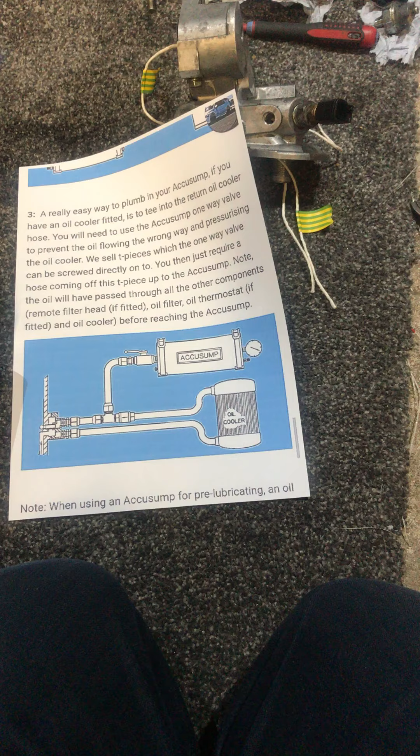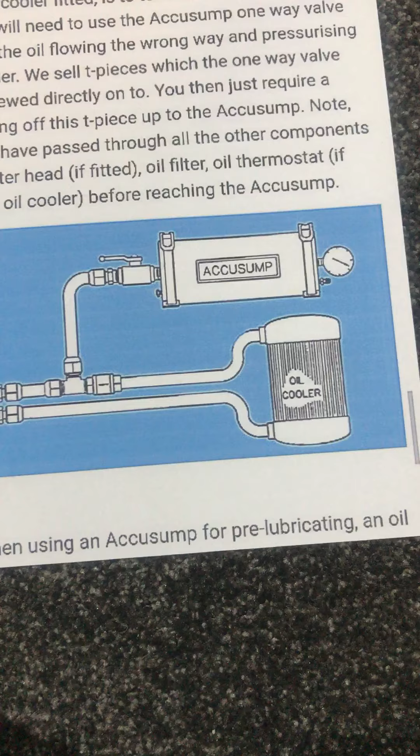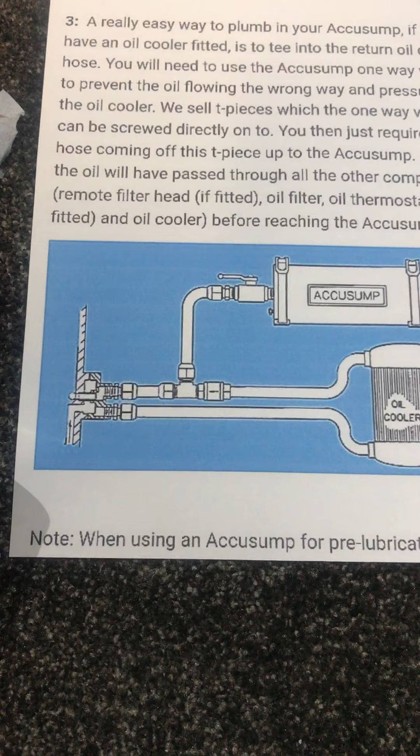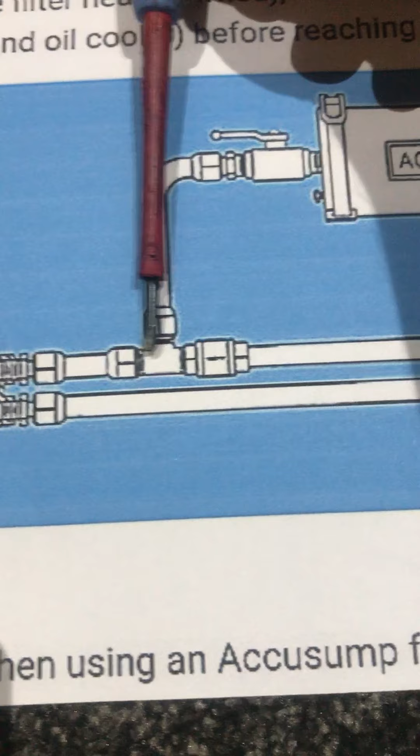Okay boys, I just want to get the boring engineering, definitely is it right, the flow and all that, bottomed out. So that is essentially how I had my Accusump. It was on the return from the cooler, and I'll show you that through the housing in a minute. And then instead of it being teed in this line here, it was just further over here, so that is the same.

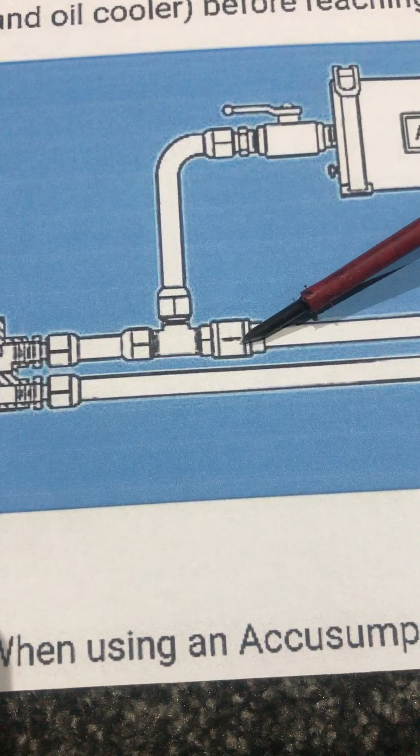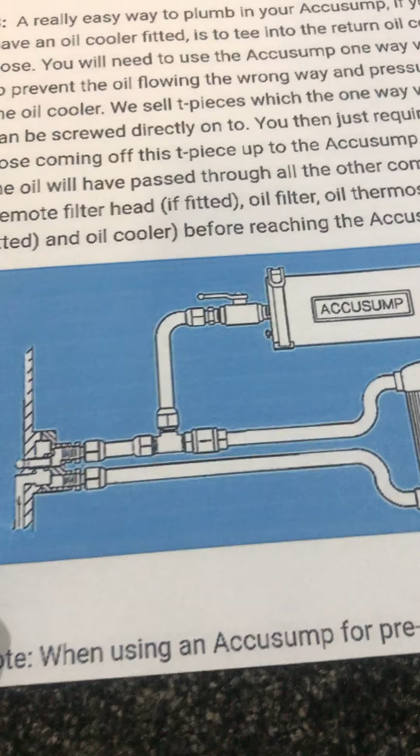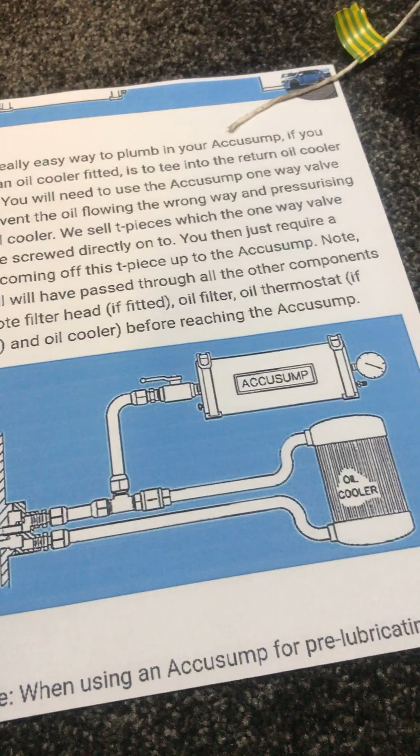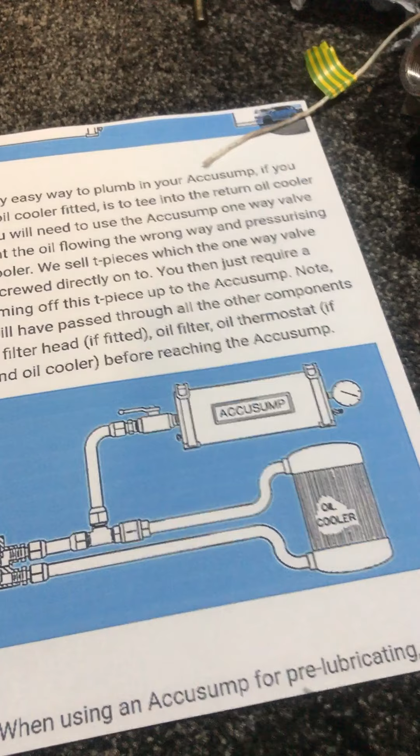But what we didn't have is this check valve here that only allows flow that way. So it's dependent on how you... because people are saying you'll still have engine failure when you're using an Accusump. The bearings won't die, they're still getting pressure, but what people say is that the oil pump is spinning and it's getting no oil. So obviously the oil pump pumps oil and sends it, but in doing that it lubricates itself. So if it hasn't got any oil, like I think Gary from APT had said, if there's no oil being picked up from the pickup, the oil gear is essentially scratching itself to bits inside the housing because it's getting no oil flow across it.

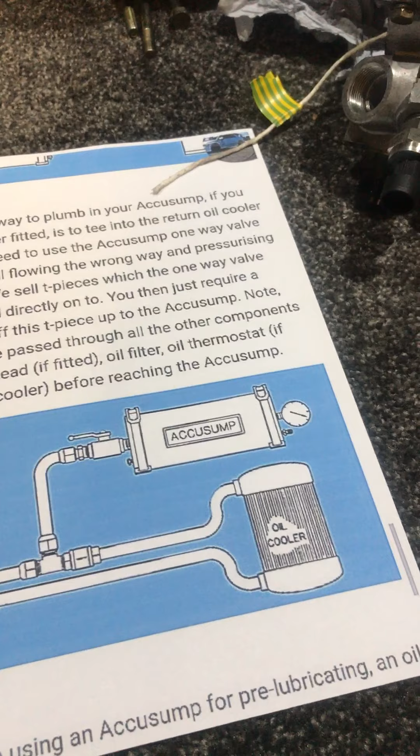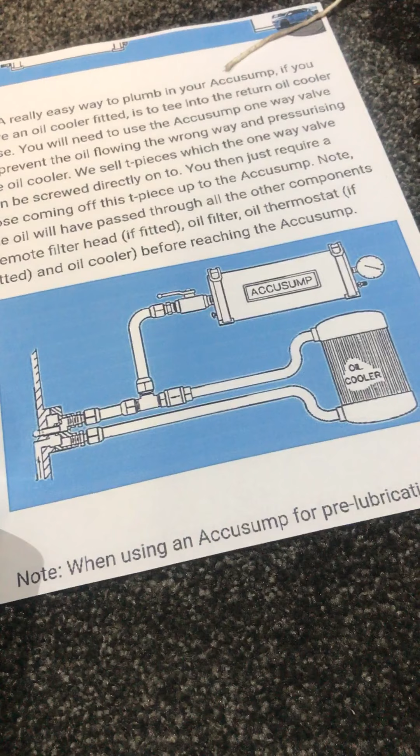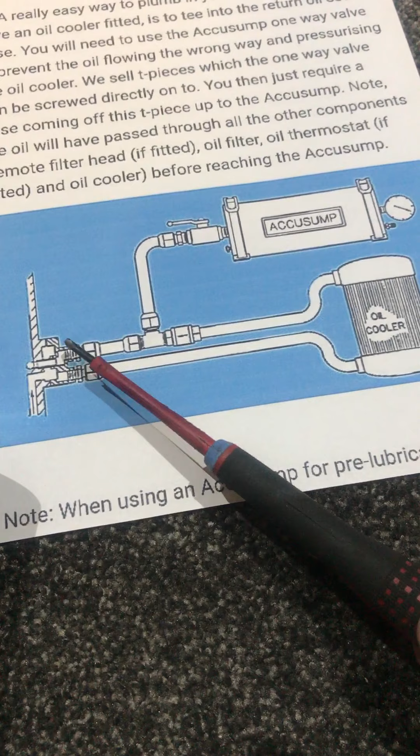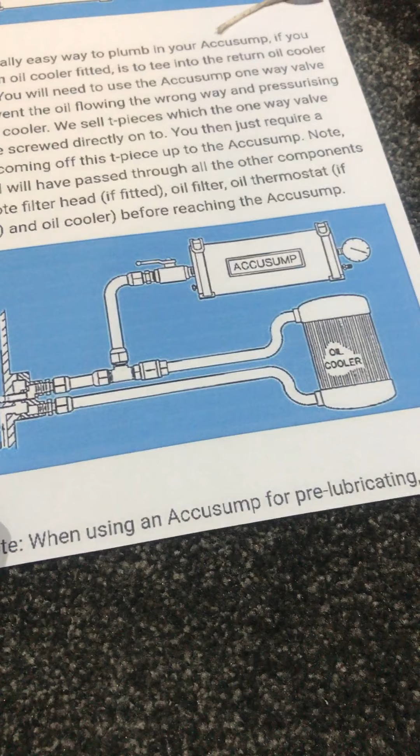It's not pre-lubricating. So the way I've got mine, I can see how I was only making 4 when my oil pump was in surge and couldn't send any oil from the pickup. My pressure logs on my ECU were only showing about 4 bar. Obviously I've had this engine failure, but it's not attributed to that because we took the bearings out. The bearings were fine. There was no wear whatsoever. So it looks like 4 bar was okay, but this is where it depends on what you think.

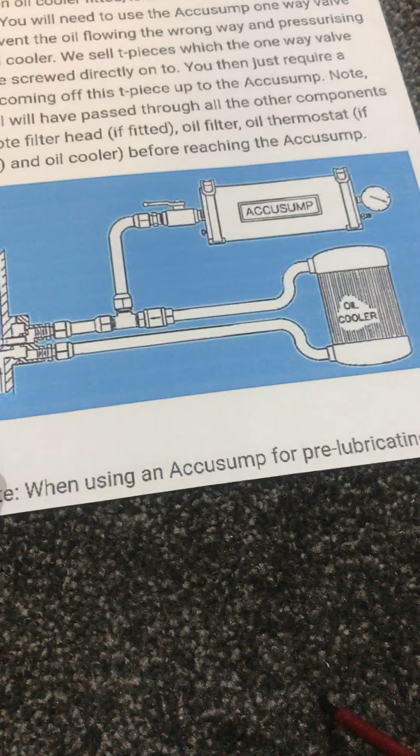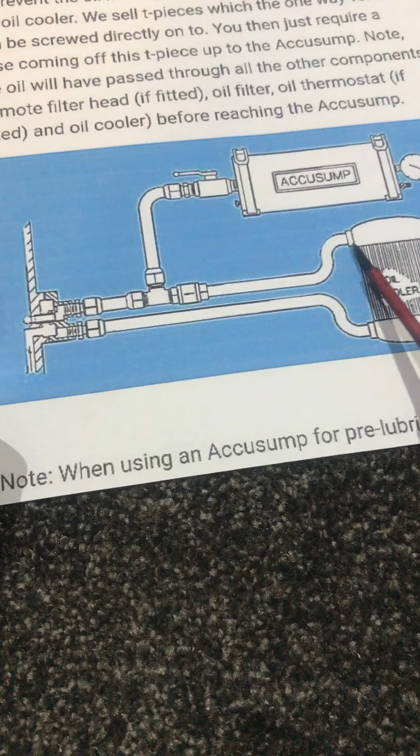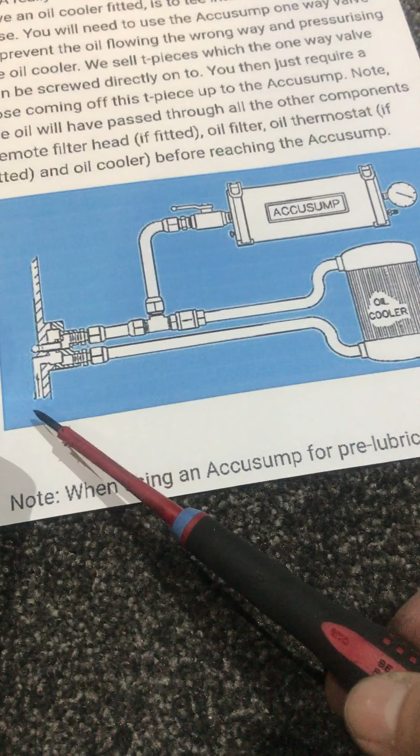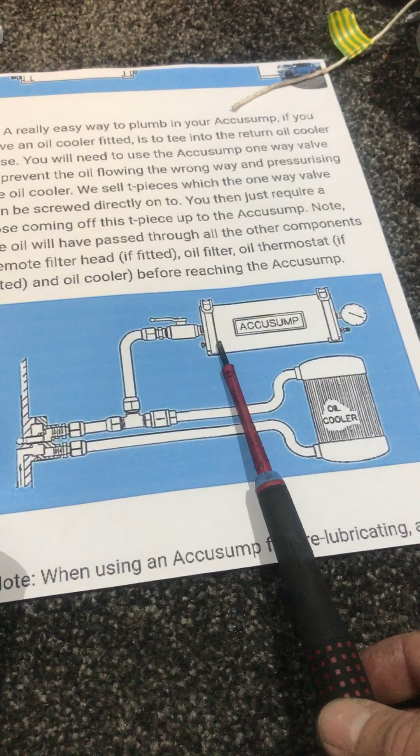Because I didn't have a check valve in here, when there was no oil flow from the pump, the Accusump was dumping oil into that line. What must have been happening is some of it was going to the bearings, and that's where I was getting the 4 bar of pressure from, and some of it was flowing back through the cooler and back into the oil pump and probably into the sump, into the pickup. So reverse flow, if you like. So whilst I like that idea because my oil pump gear is still getting oiled by the reverse flow of oil, my bearings are getting 4 bar, but I think it's reduced. And I think the oil in the Accusump is getting used quickly because the engine's getting some and we're getting reverse flow back to the oil pump.

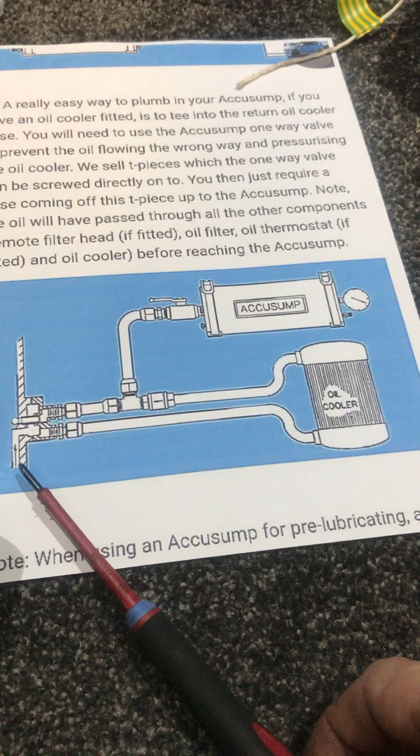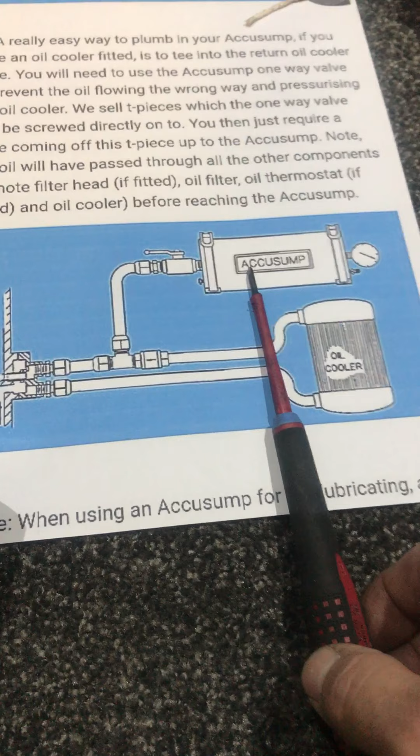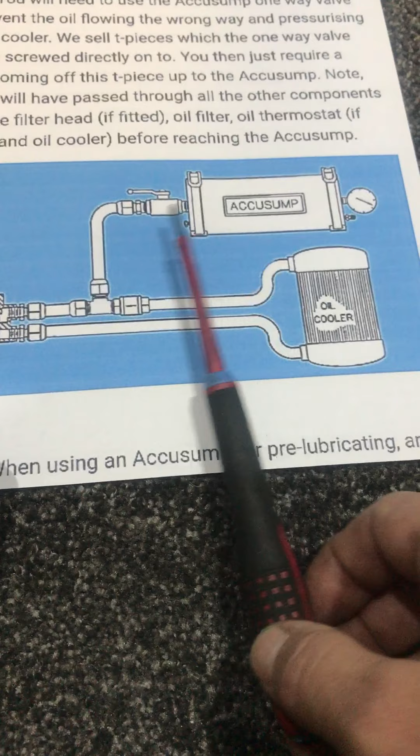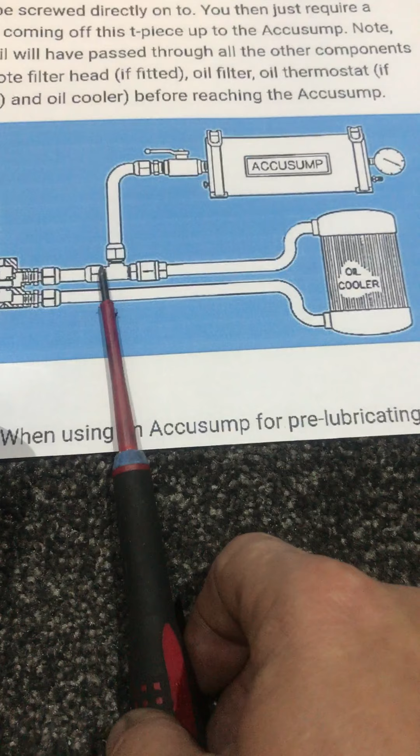So it's one of them. If you put a check valve in, you're not going to send oil to your oil pump, but you are going to have oil stored for probably a longer period, and you should have higher pressure to your bearings. So it depends what you want. I'm in two minds still whether I want to fit the check valve and get higher pressure to the bearings from the Accusump, or leave the check valve out and get a volume of oil, because we are using the big Accusump, at about 4 bar. We know it's lower than what we should be getting, like 6 bar at 6,000, 7,000 RPM. But my engine seems to have been okay on 4 bar, and the tuners are saying you only need your cut down to sort of 3 bar.

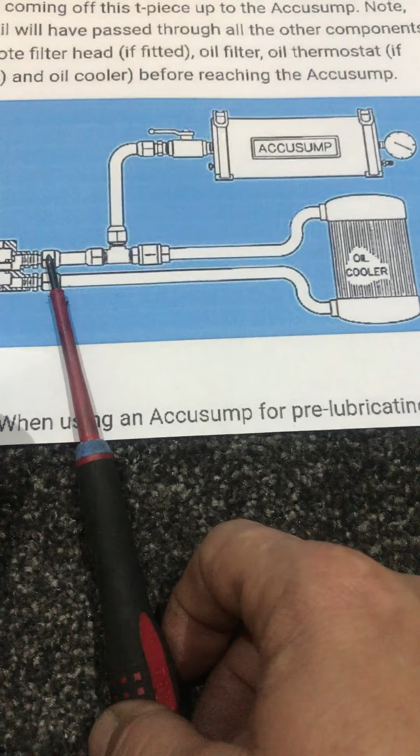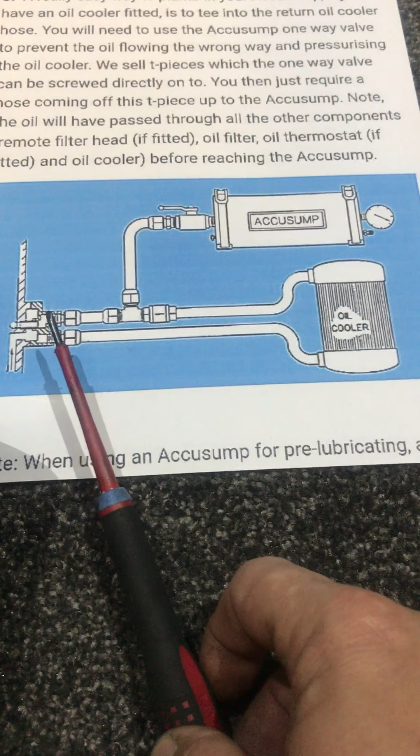So it depends what you think here, whether you want oil to go back, or if you put a check valve in, I think you're going to maintain a higher pressure, but no oil to your pump while you're in that surge, which should only be for a real short amount of time.

Fucking hell, 5 minutes. I didn't know I could talk so much shit.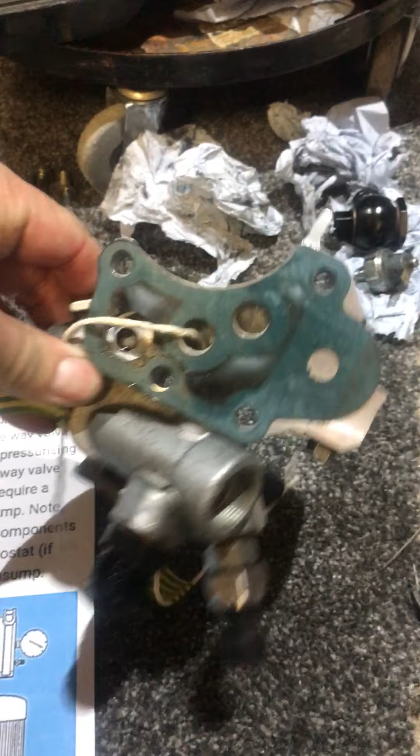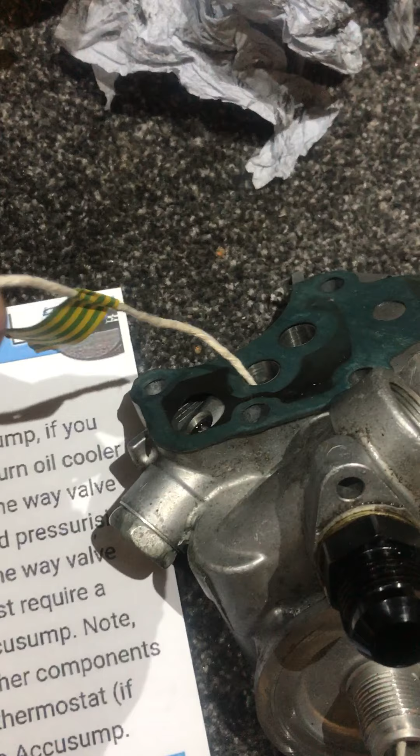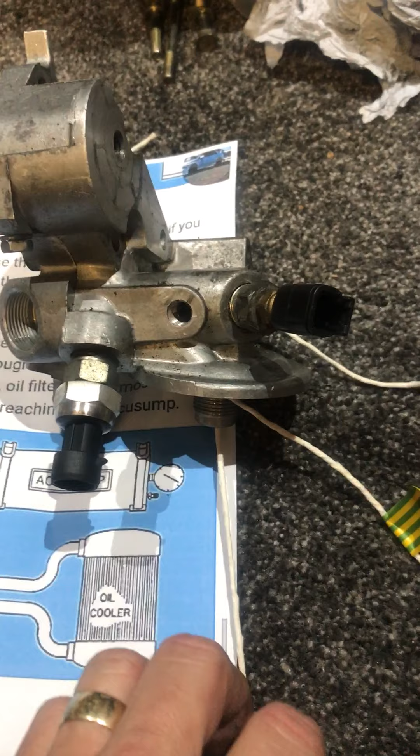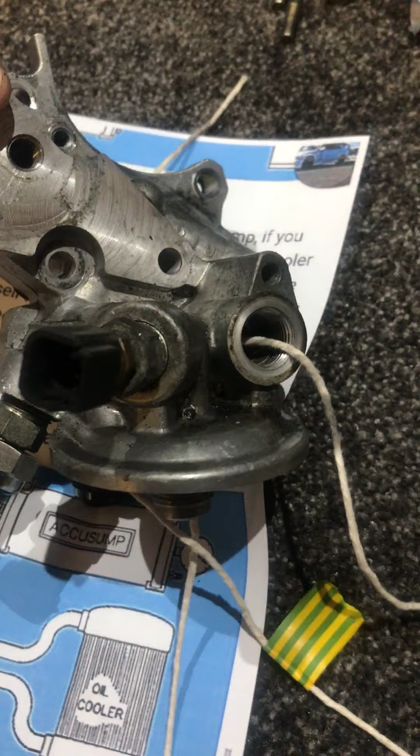And then I looked at the oil housing, because I wanted to understand where the flow came from. From Sergio's drawing, it shows the oil coming from the pump from them rebates in the block. So that must go to that hole first, and that comes out there to the oil filter first. It doesn't go anywhere else, straight to the filter. So I reckon that's right. Well, it is, because I've put the string in there. Then it gets filtered, and then it goes back into the housing, and then it comes up into the housing and goes to the cooler. There's no valve or anything in between, nothing can stop that, so it goes to the cooler first.

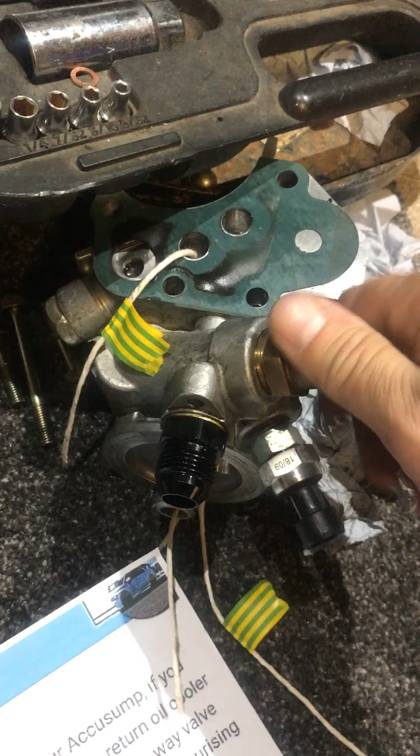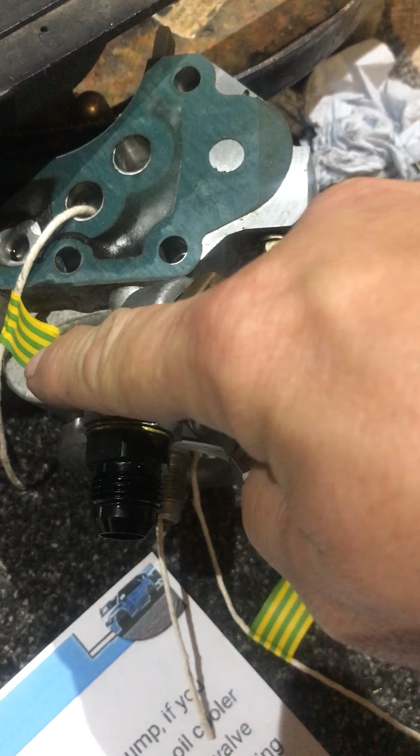But what there is on the back side is where that valve goes in. Let's see if I can get this right now, on your guide. So that goes in there, and what happens is that oil that's going up there comes up in the housing here, and when it's cold, oil is allowed to flow along there and up into the gallery. So it doesn't get blocked down this port. All three ports are open down the way and then up. So some oil comes in here and then goes up to the oil gallery.

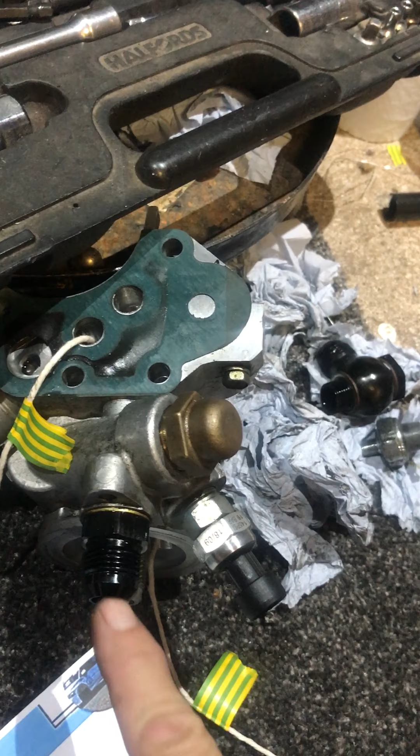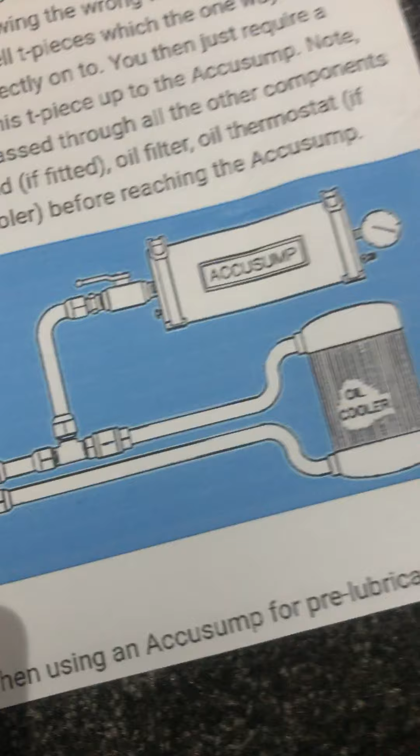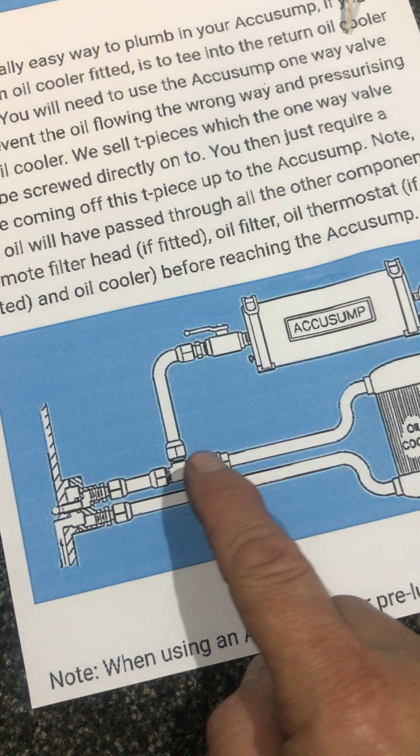When that's shut, it goes round the cooler, comes in this way, then goes up and out there, so we have got my T-piece on the right side, compared to this diagram, which is the return. So oil comes from your pump, it actually comes through the filter first, then to the cooler, comes back, and then my T-piece is here and then into the engine. So yeah, I'm happy with where it's plumbed. It's just a case of, what do you think about the check valve?

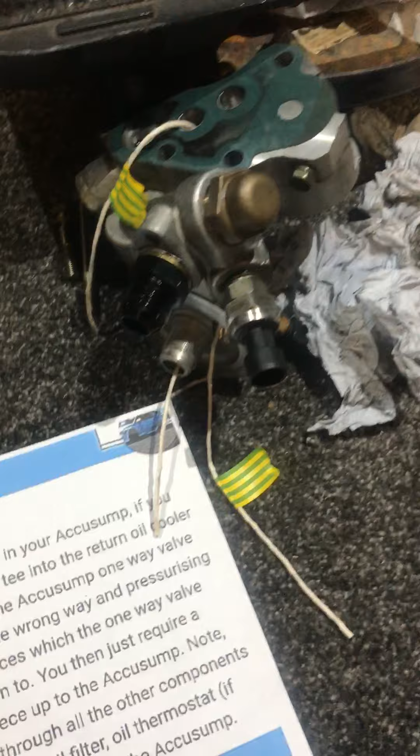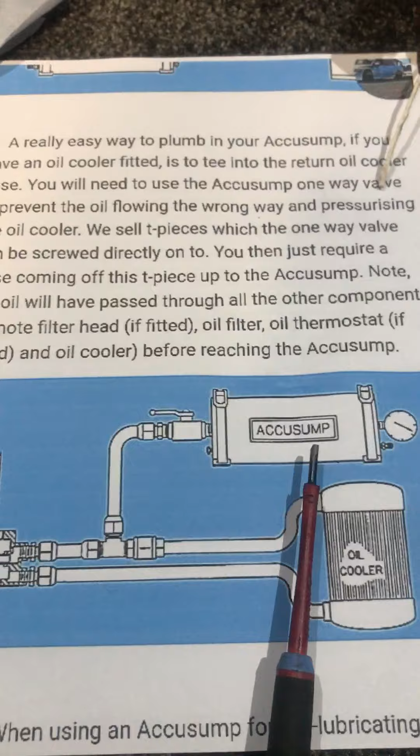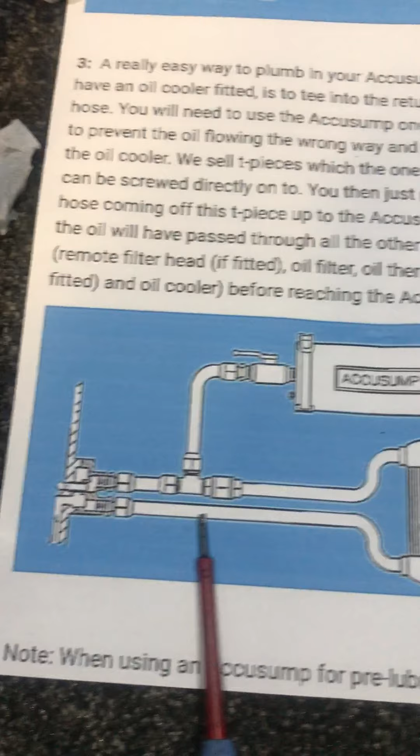And that was the reason why, 8 minutes in, when I was opening my Accusump with the engine off, I'd got 6 bar of oil stored in the Accusump, which I know because I've got a gauge on the oil side. So I turned my tap off while I was at 3,000-4,000 revs, and I stored oil pressure in there. Turn the engine off, and then, to me, if I've got 6 bar in there and the engine's not running, open that tap, then your oil pressure should go up to 6 bar or near abouts. But I was only getting like a bar, maybe even less.

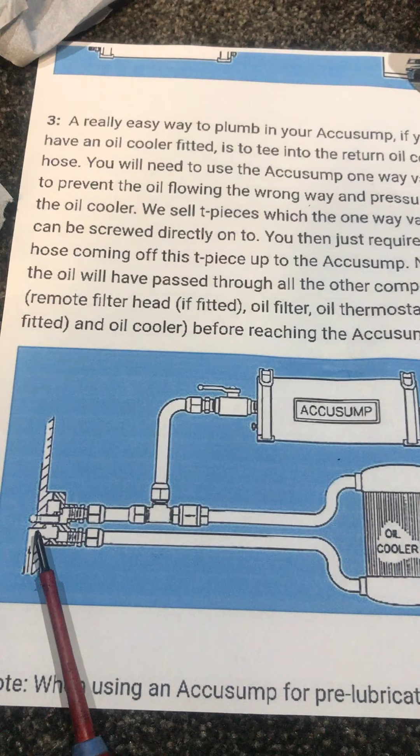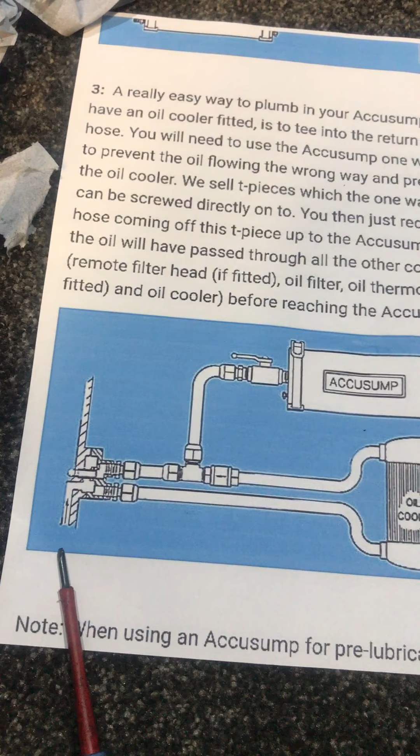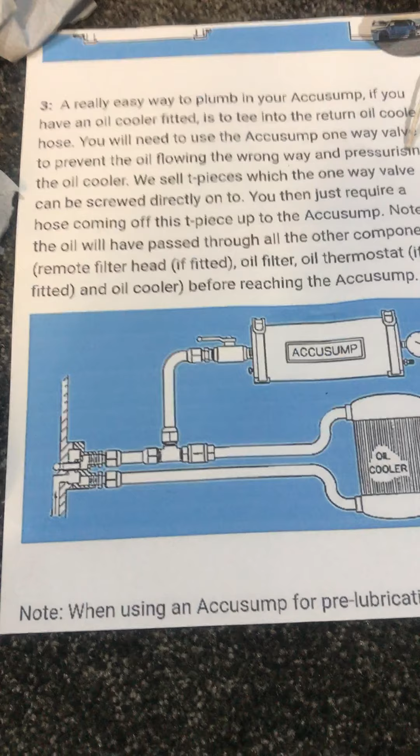But obviously what was happening was the oil pressure's just going back through the cooler and dumping straight into the sump, past the pump. So the check valve will stop that. So it's just depending on which way you want to do it. I don't think mine's a bad way, because I'm getting oil to my pump. But yeah, up to you.

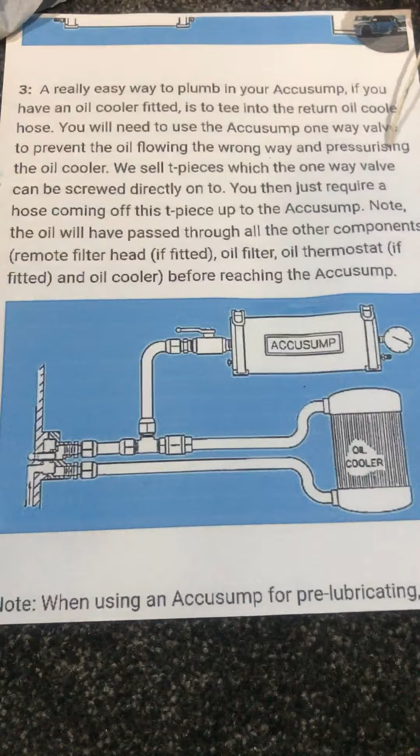Fucking hell, 9 minutes. Shut the fuck up.